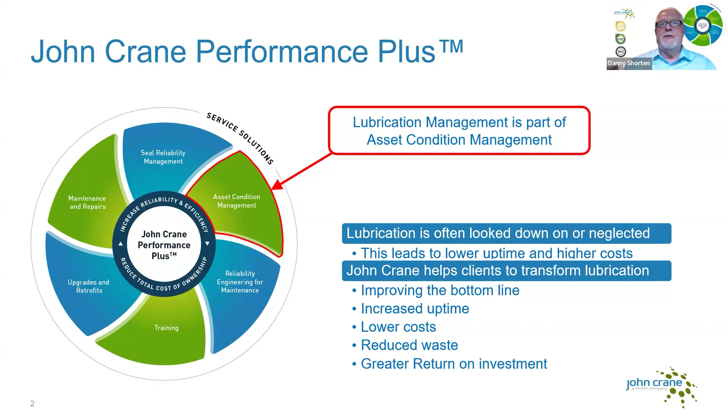Now, on the screen you'll see John Crane Performance Plus window, and the area I'm involved in is asset condition management, and this really frames the discussion we're going to have today over the next 20 minutes. Now, the core problem, I think, is that we spend a lot of time doing stuff we don't necessarily need to do. We do stuff that doesn't impact asset health, and we're changing oils, for instance, when they don't need to be changed, and in doing so we're introducing interventions that introduce avoidable risk.

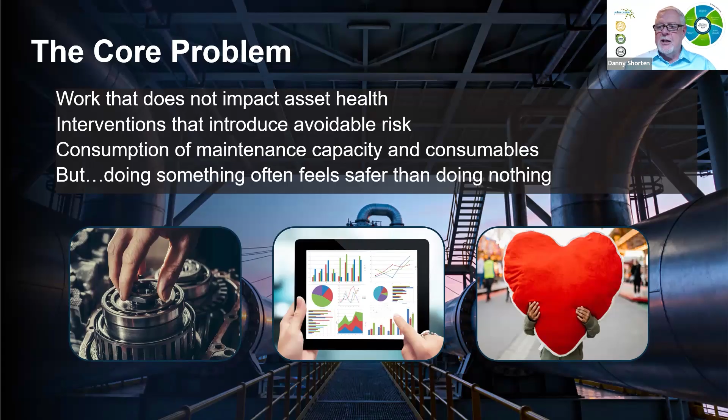However, doing something often feels safer than doing nothing, and I'm going to argue the case that actually doing nothing sometimes is actually better than doing something.

Now, when we look at a sort of medium-sized site, the calendar structure would normally look like this. So if you've had an oil survey or you've updated your maintenance management processes recently, you'll be doing oil analysis on probably your critical items. And these will tend to be driven by the sump size, i.e. the ones with the most oil in, or the criticality to operation. And you'll be sampling them on a monthly or quarterly basis.

The smaller systems, where you are not really happy to make a commercial decision to take an oil sample, box it off, send it to a laboratory 4 times a year or 12 times a year, these will be on some kind of fixed schedule. Nominally, 3-year oil change and an inspection process for top-ups. Your grease systems will be visited according to a calendar schedule. Somebody will walk a line with a grease gun and they will apply grease according to that schedule.

So the truth of the matter is, let's say in this example we've got 250 lubricated sumps, only 10% of those are going to be sampled, so you've only got knowledge of the internal condition of the oil and the machine in 10% of those assets. So 225 are unknown commodities.

Now we can inspect from the outside, we can have a look for leaks, we can do all sorts of stuff, but we don't really know what the condition of the oil is, so we're going to change it based on a calendar basis. So 225 oil changes we're going to do whether we need to or not. And that equates to about 75 oil changes annually. So that's more than 1 a week if you spread it out.

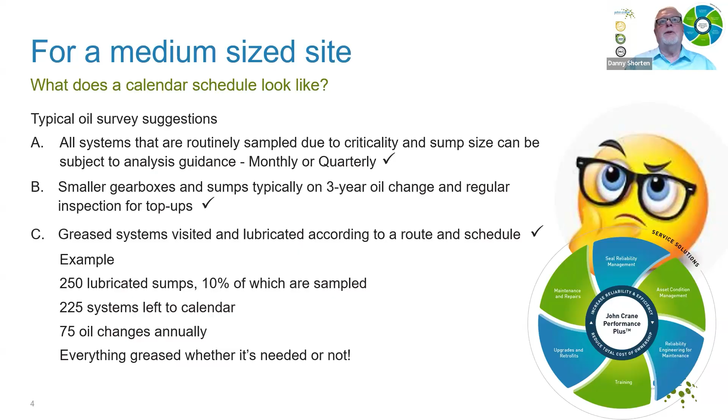And in addition, everything is greased whether it needs to be or not. And that leads to a problem because we can under and over grease systems and we may or may not know what we're doing. So can we do it differently? This is the question I want to ask everybody. Can the oil be changed or a system re-greased only when it's necessary? Well, the answer is of course yes, but there's a commercial consideration as to how we achieve that knowledge.

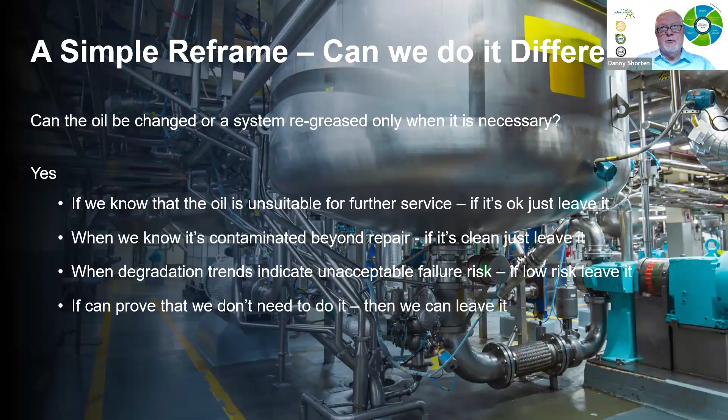So if we know that the oil is unsuitable for further service, then we'll change it. But if it's okay, we can leave it, but we need that knowledge. If we know it's contaminated beyond repair, so it's something a filtration system can't deal with, then we can change it and we can clean it. But if it's clean, just leave it. If the oil is degraded, same thing. Change it or leave it. But if we can prove that we don't need to do it, then we can leave it. And it's not negligent, it's an active decision. So we're actually changing something from a scheduled activity to a decision window.

Now the sort of things that we can do on site, because the solution is to test on site, is to look for the issues Adam was talking about earlier. Is it the right oil? Is it wet? Is it dirty? Has it aged? And there are on-site tests we can do for that. We're not concerned here about machine condition, we're simply interested in the condition of the oil. Can we leave it there or do we need to change it?

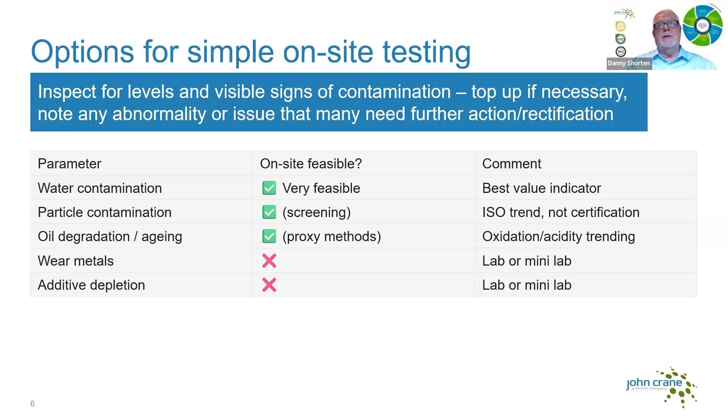So I'm not really interested at this stage in wear metals. If I was, I would send it to a laboratory or I'd build a mini lab on site to do that, but this is not the purpose of the discussion today. Similarly with additive depletion, we're not really looking at that, although there are some devices that can help us. So what tools are available? Now this of course depends on the commercial argument for doing on-site analysis.

So we can do simple things with water, such as a crackle test. We can do more involved testing using, for instance, the Spectro FluidScan handheld IR, which is quite a high value asset, but gives us a lot of information around the condition of the oil. So that can produce a go or no go, but there are costs involved there.

We can do patch testing where we actually take an oil sample and provide a filter patch, and we can use microscopy. And there are other devices which can look at relative contamination, oxidation. There are field tests for TAN, for water, etc. Now I'm not going to get into the solutions here, but there are many opportunities and options to do this.

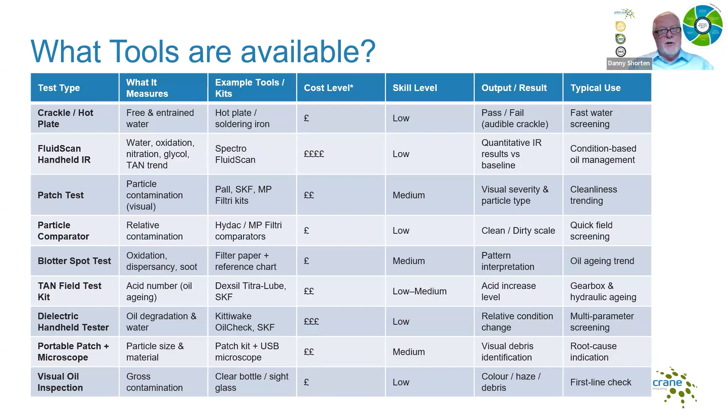Now what my view is here, because we've got a massive proliferation of sensors, we're using AI, we can use an off-site laboratory, and I certainly wouldn't suggest moving away from that. We can also do stuff on site as well, and we can gain knowledge about our equipment, even if it's very basic knowledge. We take a very small sample and we do some kind of qualitative assessment. This is good sense.

So we're managing the risk and not just ignoring it. So any system managed by a calendar leads to unknowns and represents a risk. I recently went to a company and they said, we don't change oils. We don't have problems with gearbox failures.

And when we dug a bit deeper, they were just used to doing refurbishments at a frequency which I would have considered to be excessive. But that was business as usual for those guys. So you may or may not know you've got an issue that you can improve on. And we tend to manage risks we're aware of by over-maintaining. And in doing so, we introduce more risk.

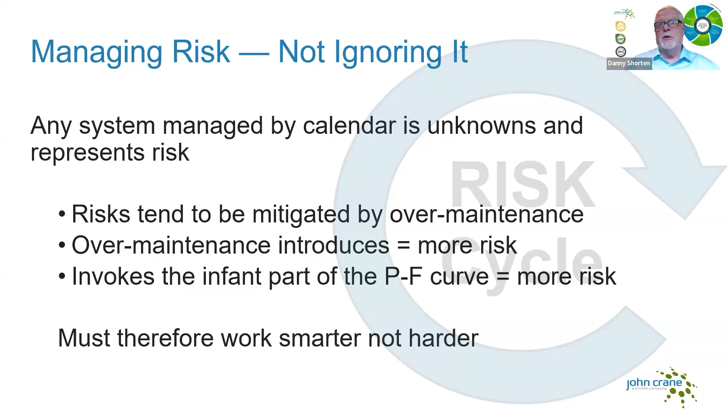And if we take a component out of service to do something to it and put it back into service, we actually create a new infant. And therefore, because it's now a new asset, we're introducing a new risk because it's further down what we call the PF curve, where the potential for failure is increasing simply because we've taken it apart and put it back together. So the argument here is working smarter, not harder, and certainly not deferring without any understanding of risk. So we need to have the knowledge in order to make the decision.

Now, we've done some work on a number of sites, and we can report quite confidently that there's likely between a 10 and 30% reduction in oil consumption, which at the moment is quite a critical thing to talk about based upon what's going on in the world and the knowledge that we're going to have supply issues, not only from the base oil and the refineries, but some of the finished products are going to be hard to get. And you'll probably have seen some messaging from distributors or oil companies to say that pricing is going to be impacted.

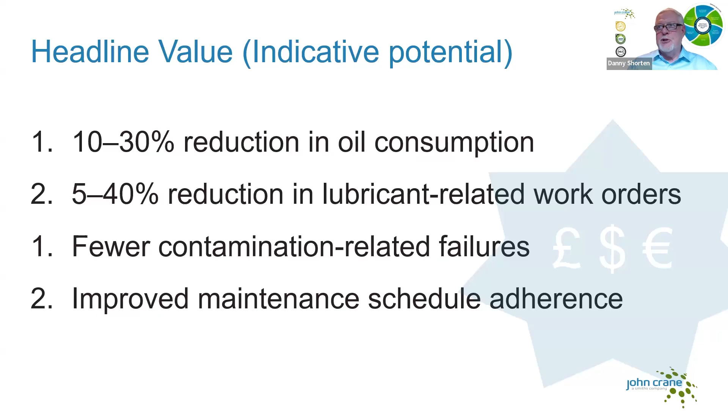But we're also going to see potentially a reduction, and quite a significant reduction, in the lubricant-related work orders, i.e. stuff we do because it's in the schedule, but we could argue we probably don't need to do it. And therefore, if we're not getting involved with those assets, we've got fewer contamination-related failures, and it's actually more likely that we're going to adhere to the schedule because we're going to be doing stuff which is relevant.

So why does this matter? Well, the standards of our operations influence behaviour. And if anybody's ever done an assessment of any company's lubrication management, they will very soon realise that it's the culture of lubrication which is often at fault. Not necessarily individual fault, it's a corporate culture around lubrication management where it's been effectively flattened and forgotten about, and it's assumed to be running within reason.

So what we have to do is make sure that we don't see task deferral, i.e. delaying maintenance, as some kind of negligence. We can defer if we have the knowledge. We have to improve the reputation of lubrication and see it as good engineering practice, not just something we have to do which is given to those within the organisation with the least training and the least skill.

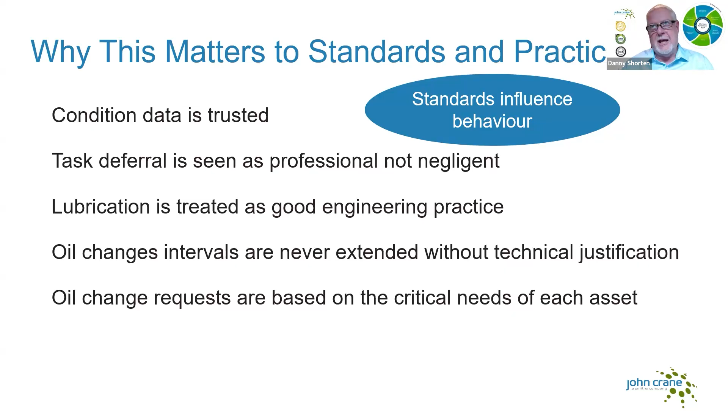We have to extend intervals with technical justification, and we have to make oil changes based upon the critical needs of the asset, not the need of the schedule, because the schedule is simply there as a smoothing tool and very often leads to greater levels of work. So why does this matter? Well, if you're using fixed time-based intervals, there is no relevance to the need of the asset. This is simply a tool to make work planning easier. It doesn't necessarily give you any value.

If we're looking at OEM guidance, for instance, when you look at the handbook, they'll say perform an oil change every 70 miles or 70 hours or whatever. And I would argue that if you're taking an industrial gearbox, the amount of potential context that gearbox can be put into is going to be much more significant than the handbook's going to really relate to. So the handbook, in many ways, protects the manufacturer from negligence because it can hold its hands up during warranty and say, you didn't follow our instructions. But out of warranty, it has no value.

So actually maintaining the condition of the oil is very much relevant to your operation and your condition, and that may mean changing it more frequently or actually less frequently. The problem with schedules, again, is it's very much focused on convenience. It's about the planning aspect, not necessarily the needs of the asset. And when you have something which is not based on the needs of the asset, schedule compliance, which is very often a metric that we use to measure how good we are, has no relationship to the reliability.

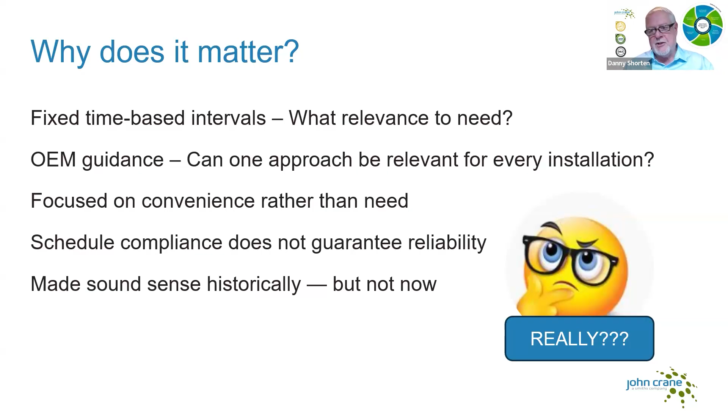It means you've done something, but it doesn't necessarily mean you've gained any benefit. And these, I think one would argue, historically were very sound views, but this now is changing because we can access more knowledge and have the ability to make better decisions.

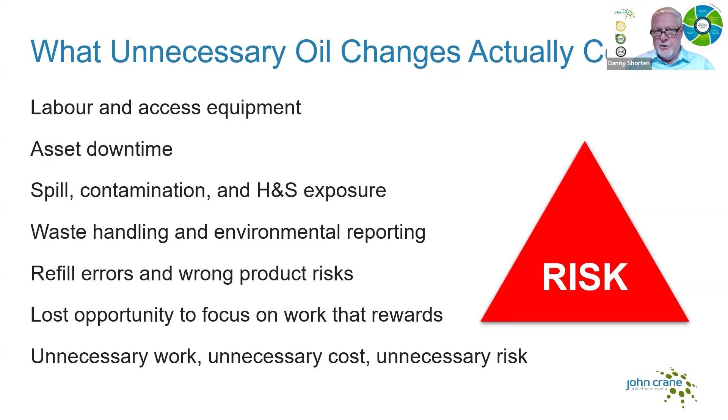So what costs happen? Well, we have to pay for labour, we have to take the asset out of commission, we've got to manage any spills and contamination, we've got to expose individuals to health and safety issues, we've got waste, we've got potential errors due to human errors and perhaps training issues. And of course, we're now focused on work that is not rewarding us. We're focused on work which is simply a schedule compliance task, creating unnecessary work, unnecessary costs, and unnecessary risk.

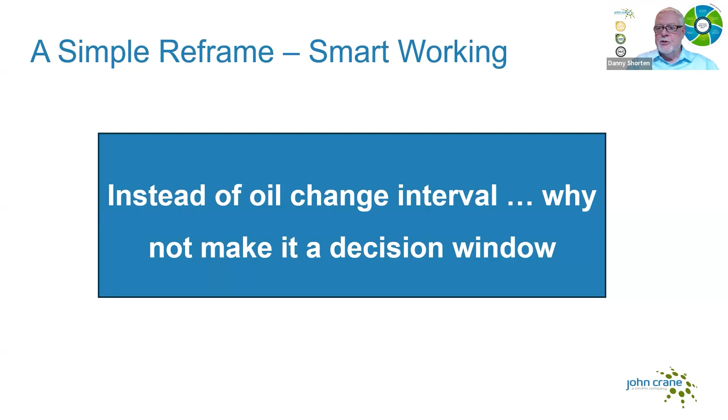So instead of seeing an oil change interval, why not make it a decision window? This puts the power back into the engineer and the reliability management to actually do something that adds value, or to avoid it in the knowledge that risk is still being managed. So when we're using a decision window, we can define the acceptance limits and alarms for every system. We make decisions based on evidence as opposed to simply because it's time to do something, because it's the 4th of June and that's what we do on the 4th of June.

We've got a clear authority to defer and extend oil change interval with time and date stamp verification of status, which gives us a feedback loop to confirm these decisions are safe. And we have confident knowledge of condition.

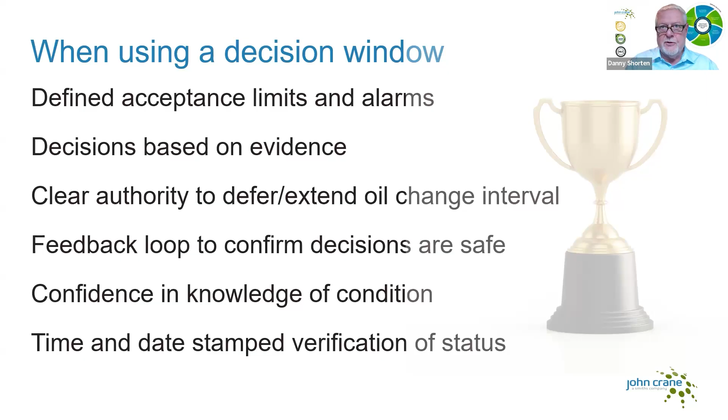Now, one real-world example, which I can quote, was a large refinery over in the States, and they were very diligent in doing their oil changes. And the scale of it, as you can see, was quite significant. And they did a cost analysis by using the Spectro FluidScan device, which allowed them to visit each sump, take a very small drop of oil and assess the oil condition, go, no go, etc.

And in the first year of the trial, they actively identified that 90% of the systems did not require oil change. Now, over time, that number will drop because oil will require changing at some stage. But they actually avoided oil change on over 2,000 systems. And their calculation, not mine, was actually quite significant in terms of the first year. And they recovered their capital investment also quite quickly in that period of time.

Now, noting that that capital is probably going to need replacing in 5 years, they've got 4 years of access with the only cost being actually taking the sample. Their prediction long term is to permanently eliminate 50% of the previously scheduled oil changes through condition-based decision making with appropriate risk management. And they are now mapping this out to other sites.

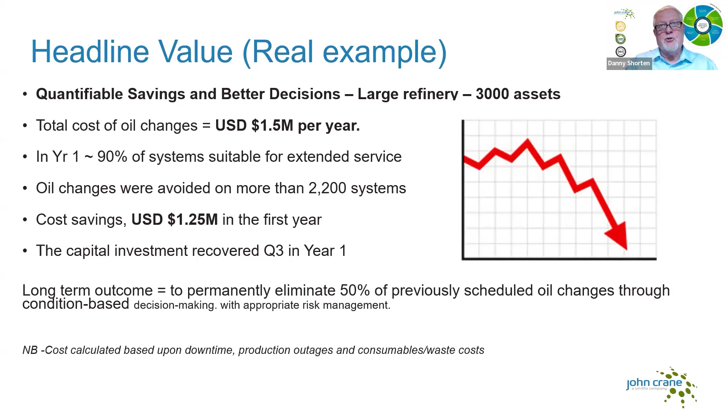Now, admittedly, this is a large group of assets and that may not be relevant for everywhere. But the process suggests that at least we should ask the question, is there an opportunity to move maybe not all of the assets you don't put in an oil condition monitoring program, but some more assets into that so we can avoid unnecessary oil changes.

So I'm coming to the end of my 20 minutes. My key takeaways are scheduled oil changes feel safe, but they add cost, and we can see that cost can be quite considerable. Condition data, if we can acquire it and trend it, adds a degree of certainty to our decision-making processes. And this new activity does not necessarily require any significant training or upskilling. We use very competent people generally, and giving them the skills and awareness to take lubrication to another level is quite straightforward, so long as it's built into the culture.

So we also get value from avoided work, the risk reduction, and the added assurance that we are actually working based on data and intelligence. And as you've seen, the value can be significant for medium to large size asset populations.

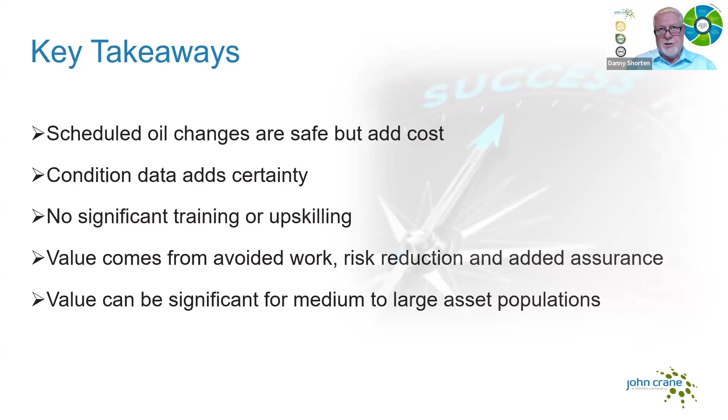Condition-based lubrication is something which people are adopting more across all industries, and as you've shown, sometimes doing too much can cause problems, even in the smallest of oil or grease reservoirs. Understanding the condition is invaluable for improved reliability and sustainability, especially in this time of worry with lubricant supply. We certainly don't want to be changing oils and greases just because.